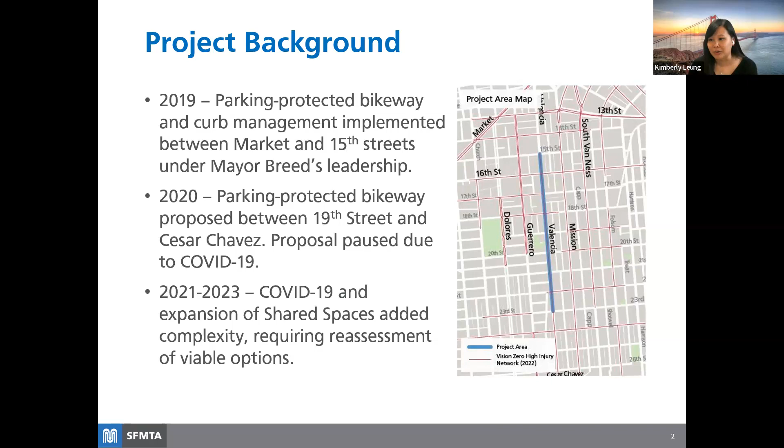Unfortunately, there was opposition to this design, and we actually received numerous requests from individual businesses, merchant associations, and faith institutions to consider a center running design to reduce impacts to the curb lane. But before we could finish working through concerns on the parking protected design with the community, the project was paused due to the COVID-19 pandemic. And since then, the landscape of Valencia has really changed following COVID, particularly with the expansion of our shared spaces program here in San Francisco.

So this image from Google Street View from April 2022 really highlights the challenges that we're trying to address in the project. Here you can see the competing needs of the corridor. There's new shared spaces along the curb, vehicles pulling across existing bike lanes to get to and from parking spaces, and even vehicles double parking in the bike lanes itself.

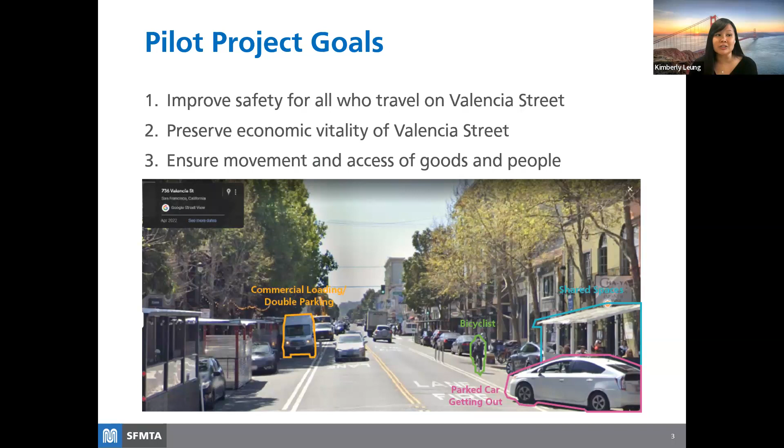So for this pilot project, we identified 3 key goals, which are to improve safety for all who travel on Valencia Street, to preserve the economic vitality of the corridor, and to ensure the movement and access of goods and people. Just taking a really quick look at the data here, Valencia between 15th and 23rd Streets is on the high injury network. From 2018 to 2022, there were 132 collisions, including a fatality on this section of the corridor. Another pedestrian was also killed at the intersection of 16th and Valencia in January of this year.

Within the project limits itself, 40% of the collisions are between vehicles and bikes. The most common reasons for collisions involving a bicyclist were because of unsafe turns, lane changes, and dooring by drivers. So there's currently this mismatch between the high demand for the curb space and the amount of available space for loading. This has really resulted in vehicles double parking in the bike and vehicle lanes. And in addition to that, another 22% of the collisions on the street are between vehicles and peds. The most common reason for those collisions is drivers failing to yield the right of way at a crosswalk.

So getting into the design itself, to address the ongoing safety challenges on Valencia, our pilot includes a suite of tools. We have bicycle safety improvements, pedestrian safety improvements, turn restrictions, and curb management. From the pedestrian standpoint, to increase pedestrian safety, every intersection will include daylighting, which are red zones, to increase visibility among all the different roadway users, and advanced limit lines, which show drivers where they should be stopping.

All left turns off of Valencia onto the side streets will no longer be allowed, and no right turn on red regulations are being introduced at certain intersections. And these turn restrictions are important for pedestrian and bicycle safety, regardless of the bikeway design. The project also includes a complementary curb management plan, which includes a reconfigured curb layout, new cross-street meters, and the application of dual use zones and general loading zones. And I'll talk a little bit more about those new loading zones later on in the presentation.

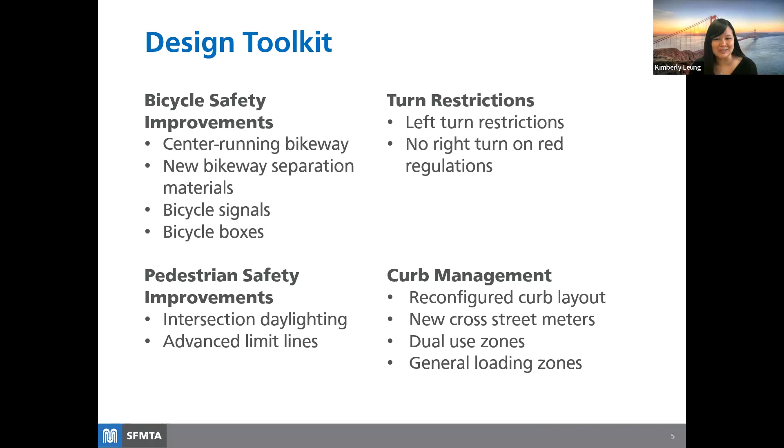So to introduce you to Valencia, this is a cross-section showing what Valencia Street is like today. Between 15th and 19th Streets, Valencia is currently 52.5 feet wide with 15-foot wide sidewalks. And there's currently 1 lane in each direction with painted bicycle lanes on both sides of the street. There is also generally curb space on both sides of the street for loading activities and shared spaces.

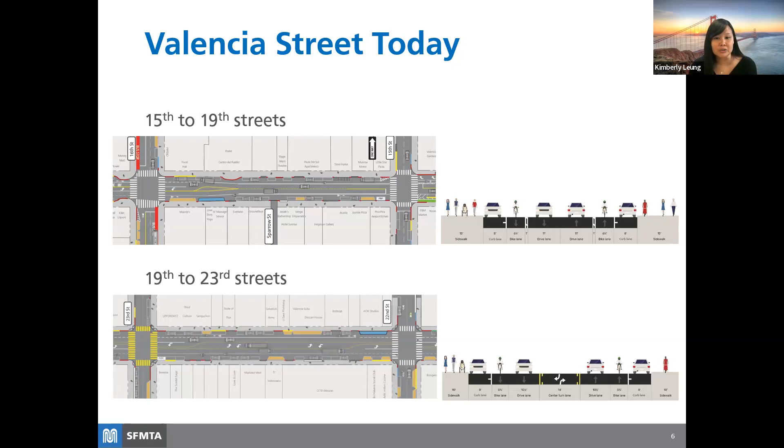On the bottom of the slide, this shows Valencia between 19th and 23rd Streets, a very, very similar cross-section, but the one exception is that this section has narrower sidewalks that are 10 feet wide. So there is additional roadway space for a two-way left turn lane in the center of the roadway.

So with our pilot project, we will be installing a 12-foot wide center running protected bikeway. For those of you that have been to San Francisco and have ridden the two-way bikeway on the Embarcadero outside the ferry building, that bikeway itself is 12 feet wide. So this Valencia center running bikeway will be separated from vehicle travel lanes with a painted buffer that will include new bikeway separation materials. One lane of travel in each direction will be maintained, and curb space will also be maintained on both sides of the street.

This slide shows the design for the block between 22nd and 23rd Streets. Again, this is the slightly wider section of Valencia. So south of 23rd Street, there are painted bicycle lanes. So new bike signals and bike phases are also included at this intersection to, again, transition those bikes between the two different bikeway designs. And at the intersection of 22nd and Valencia, this is really showing our typical treatment that we'll be using to help bicycles turn on and off of the corridor using bike boxes. And because this section of the corridor is a little bit wider, we're able to dedicate more space to the buffer area that will be separating the bike lane from the vehicle travel lanes.

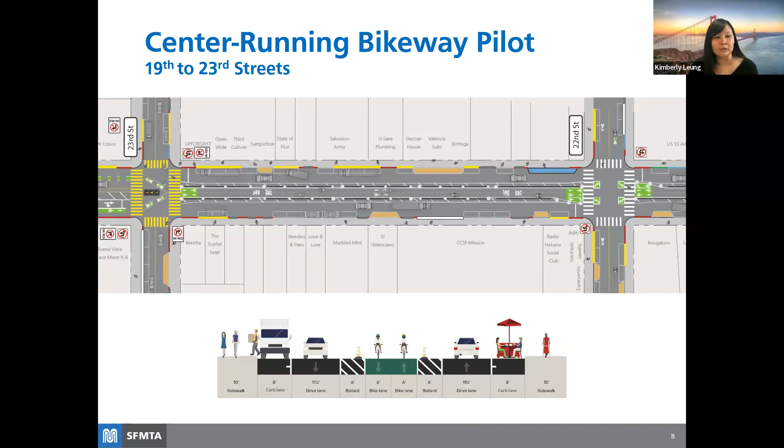So initial outreach for this project started in July of 2022. And in fall of 2022, we launched a virtual open house along with 2 virtual office hours to share this design. Our virtual open house had over 4,600 webpage views, and we received 618 comments and questions. So as you can imagine, it took us quite a while to get through all those comments and actually provide responses to that. But in general, feedback from community groups was mixed. Some people wanted no changes, but most people supported our goal to improve safety along Valencia Street. But people who opposed or remained neutral to the center running bikeway design were supportive of improving safety, but not necessarily of the design itself.

But from the comments and questions that we received during the open house, these were the top 3 concerns. People wanted us to focus on the materials that we're using to separate the center running bikeway from the vehicle lanes. There were also concerns about the enforcement of illegal turns and loading behavior, and also how people would enter and exit the bikeway to access the mid-block businesses.

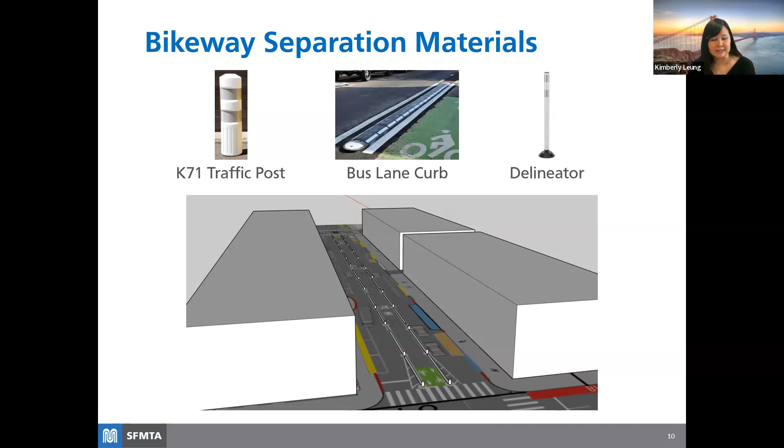So to address the concerns from the open house, we worked closely with our city partners to test more durable and robust bikeway separation materials. So K71 posts and bus lane curbs, both of these have not been used in San Francisco before. We will be introducing these in the buffers next to the bikeway. These materials, along with our typical delineators, are what we'll be using to really prevent that vehicle encroachment into the bikeway. And for people on the bikes who would like to enter and exit the bikeway mid-block, there will be occasional gaps in the bus lane curb material. And again, the intersections will have bike signals or bike boxes to help with that movement on and off of the center running bikeway.

And then just touching a bit on the curb management piece of this project. So as I stated earlier, today on Valencia, there is this huge demand for loading. And because there isn't enough space at the curb, cars are overflowing into both the bike and vehicle lanes. So with this curb management plan for the project, we're going to reconfigure the color curbs to better meet the demands of the corridor. And there are 2 new tools that we're using. Those are the general loading zones and dual use zones.

So general loading zones were first introduced by the MTA in 2021. These zones allow people to pick up or drop off goods using personal vehicles, and they are allowed to leave their vehicle unattended for up to 5 minutes. And there are other instances where we're choosing to combine the general loading zones with commercial loading for trucks and vehicles, and we're creating what we're calling a dual use zone. So this is a zone where there's 2 regulations in the same curb space at different times of the day. Most of the new dual use zones on Valencia are commercial loading during the day and then general loading at night.

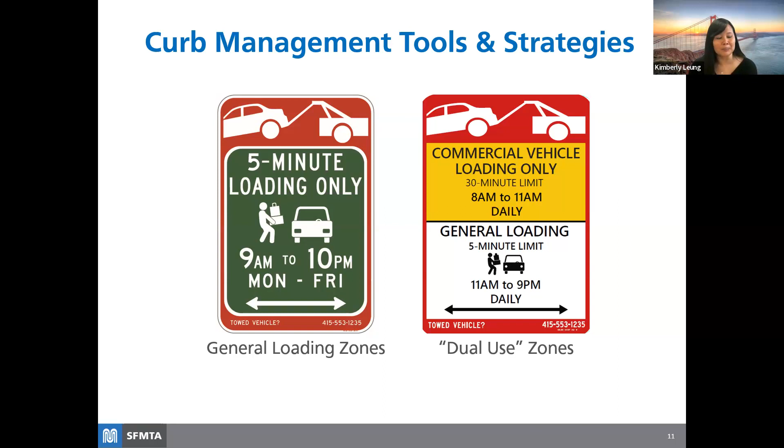So at the start of the presentation, I did say that we initially proposed continuing parking protected bikeways on Valencia, but the direction of the project did change with the onset of the COVID pandemic. So there's been a lot of discussion and feedback on the center running bikeway that was ultimately approved. So I'm going to take some time to walk you through the curbside, one-way protected bikeway design and kind of explain to you why this is not recommended, at least at this time for Valencia.

So on this slide, you can see an example of what a curbside one-way protected bikeway would look like. There's bikeways on both sides of the street. And just with this alternative, the bikeways are shifted to be adjacent to the sidewalk, and then they're separated from the vehicle lane by either a floating curb lane or delineators. And this is a very typical design that we have on other sections of Valencia and also all over San Francisco.

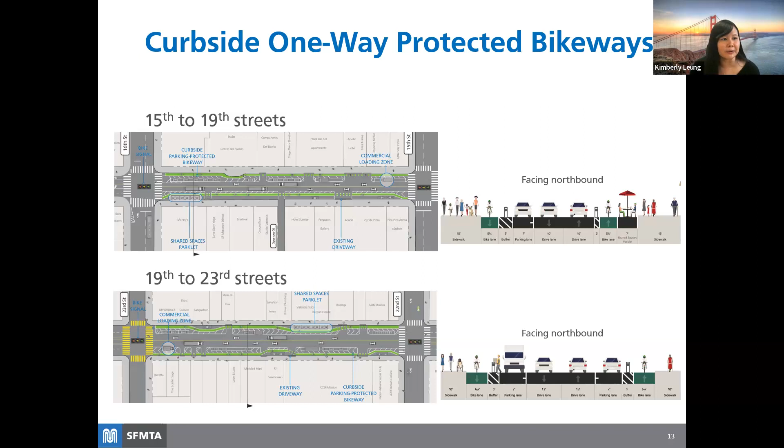So this design was initially proposed as part of our efforts in early 2020. At that time, approximately 40% of the curb space would have been repurposed for the protected bikeways. With our shared spaces program that was introduced during COVID, one of the things with that program is that they do not typically permit floating parklets due to accessibility concerns. So with the curbside bikeway design, that bikeway does have to weave around the shared spaces. That weaving reduces the available curb space for loading, and it also increases the unused space, particularly when the bikeway is making that transition to and from the curb. So that reduction of curb supply could result in more double parking or blocking of the bike lanes.

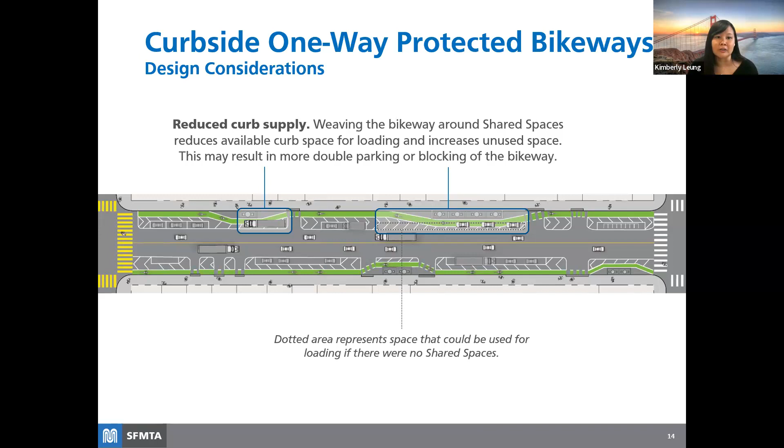But also more importantly, if this design were to be proposed for the section where Valencia is a little bit narrower, there would be more significant curb impacts. We would actually not be able to have parking and loading on both sides of the street. So in the wider section of Valencia between 19th and 23rd Streets, floating curb space can be installed on both sides of the roadway. However, in that narrower section of Valencia between 15th and 19th, floating curb space can only be maintained on one side of the street, as it's shown in this slide.

The San Francisco Fire Department requires 26 feet of clear width for emergency response operations. So on this slide, you can see the floating loading on the top part of the image. But once you convert the opposite side of the street to floating loading, the design doesn't meet the clear width requirements of the fire department. So here, loading can only be maintained curbside on the opposite side of the street, but the bikeway then cannot be protected with delineators or other materials.

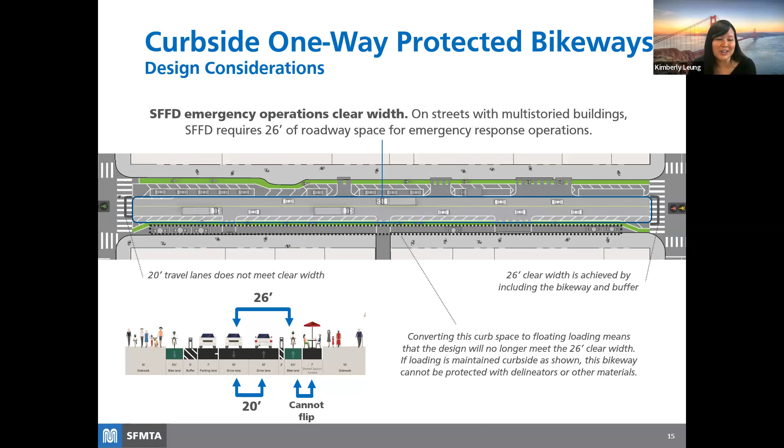This slide shows a variation of a protected bike lane on the opposite side of the street where all the curb space can be converted to shared spaces or other roadway activations. We could also do something where the bikeway can continue to weave back in towards the curb to allow a wider buffer between the vehicle lane and bike lane, but in general, there are greater impacts to the curb with this design.

And then finally, since the shared spaces program typically doesn't permit floating parklets, the addition of any new shared spaces or even the removal of existing shared spaces would require us to constantly realign the bikeway. So in both situations, we're going to need to reconfigure the curb layout to meet the new loading needs of the block. And this process does take some time to redesign the bikeway and redo the curb plan. It will require us going to a public hearing every time before we would be allowed to remove and install the new roadway paint and delineators.

Businesses right now are still continuing to adjust their operations following COVID. So this curbside, one-way protected bikeway is just not really recommended right now while we sort out our shared spaces program and the loading issues on the corridor.

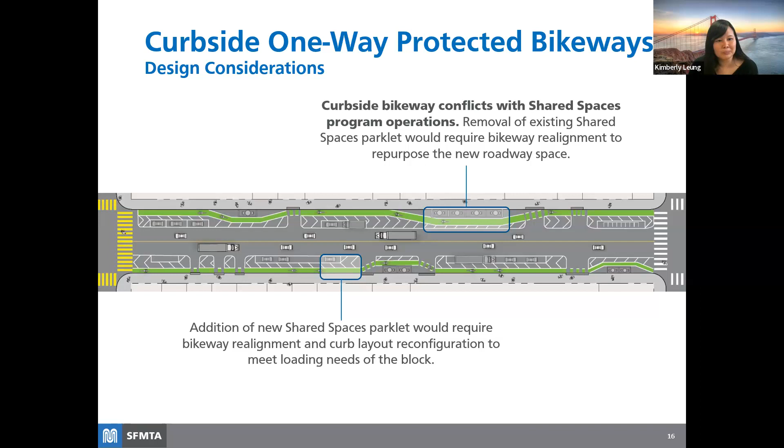So just again, given the design constraints at this time, we are choosing to pilot a center running bikeway between 15th and 23rd Streets for up to 12 months. We will be fully evaluating this because we do recognize that this is a new and different design in the US and in San Francisco. So we will be looking at metrics, including safe behavior, effective design, and mobility as a part of our evaluation.

So to really understand if the behavior out there is safe, we will be observing user compliance with the new left turn restrictions and bicycle signals, vehicle speeds, and bicycle and pedestrian conflicts at the intersection. We'll also be looking at traffic collision data, vehicle loading behavior, the bike positioning on the street, bikeway ease of access, and emergency vehicle interactions with the bikeway to see if the center running design is actually an effective design for Valencia.

And we also want to understand the mobility trends. So we'll be taking a look at bicycle, pedestrian, and vehicle volumes, transit travel times, and changes in vehicle congestion levels. We'll also be doing intercept surveys to really understand where people are coming from, where they're visiting on the corridor, and how they're choosing to travel to and from Valencia now. So ultimately, all the findings from this evaluation will help inform the more long-term design for the corridor.

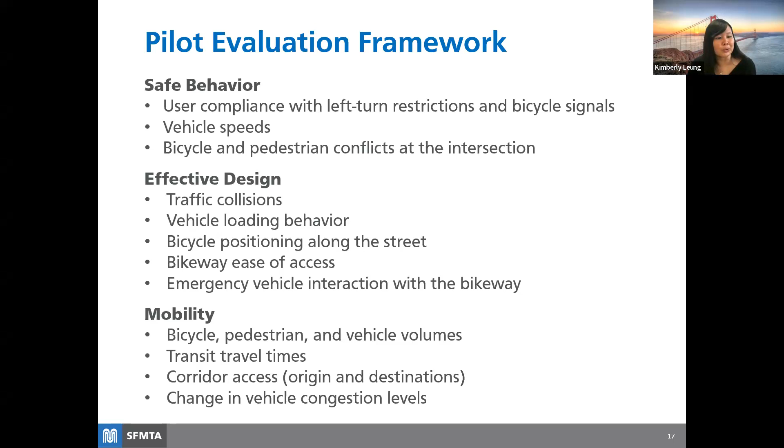And this project was approved on April 4th, and we did begin construction 20 days later. As a part of our project, we will be making observations and collecting data. Our first milestone for data collection will be this fall, 2023, and we'll also be taking a look at data some more in spring of 2024. By the end of this year, we are going back to the SFMTA board with some initial findings from our first evaluation period.

Some other work that we're doing will be starting this summer. We'll be studying the long-term visions for Valencia and working with the community on additional pilot treatments that could help inform the long-term vision for the corridor. So the study and these potential pilots will also be looking at placemaking and traffic circulation along the street to really just help further the pedestrian and bicycle safety goals that the MTA as well as the community has for Valencia. So I will wrap up this presentation by sharing some photos of our construction over the last month.

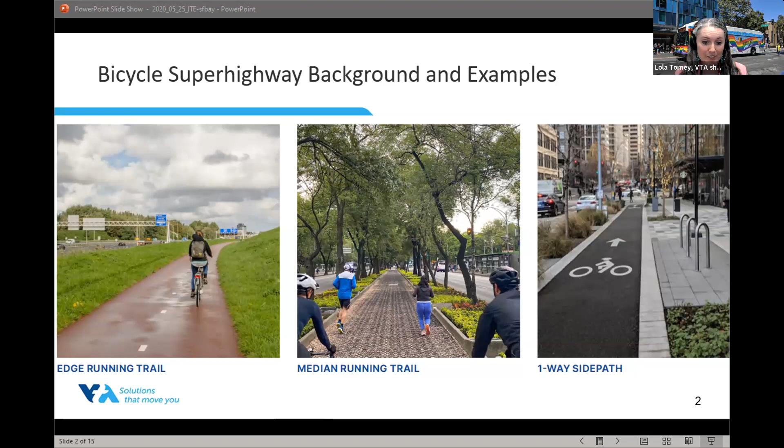And so you can see the bike superhighways can have varying designs that provide separation from vehicles and provide low stress. So in our next slide, we're going to answer, what makes a bikeway super? What is a bike superhighway? They are quickly direct. They don't require bicyclists to weave around side streets or take back roads. So there's a direct and easy route for bicyclists. They're accessible. They take you where you want to go.

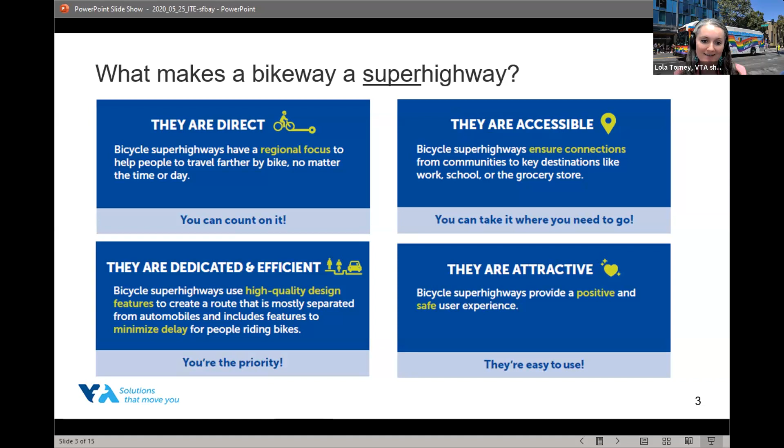They are dedicated. They offer bicyclists their own space that is separated from motorists and pedestrians. And they are efficient. They reduce delay for bicyclists. And most importantly, in my opinion, they are attractive. They are a pleasure to ride on. They bring people joy and really want people to ride bikes.

And so in 2021, our VTA board adopted the Bicycle Superhighway Implementation Plan that proposed a bicycle superhighway network that would serve our county. We narrowed the proposed list down to 17 corridors. We had like 35 to start with and narrowed it down to 17. And most of the networks build off our existing trails. They're labeled here on the map, you can see.

Most of these trails actually run north-south. That's just based on the topography and geography of our county. Most of the trails run adjacent to our creeks and rivers, which run north-south. So when we were doing the outreach for our countywide bike plan, we kept hearing from folks, we really need an east-west bikeway. So we focused on that for our first study that we were calling the Central Bikeway Study. Go ahead, Brent, hit next slide.

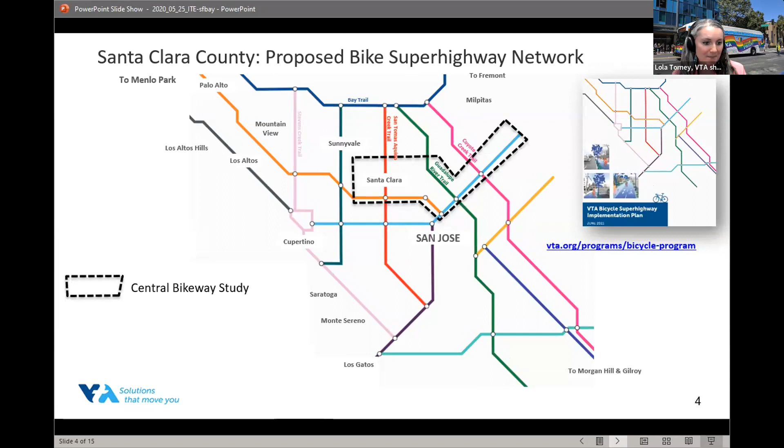Boom, there it is. That really studied the east-west corridor from the city of Santa Clara up to North San Jose over into the east. And so here is a list of the final routes, all the 17 routes shown on the map. We used to have Central Bikeway Study, which is underlined here in the requires further study to determine feasibility. We were able to, through the Central Bikeway Study that we'll talk about in a second, move it over to the planning work done and corridor alignment fairly certain column. So that was a win.

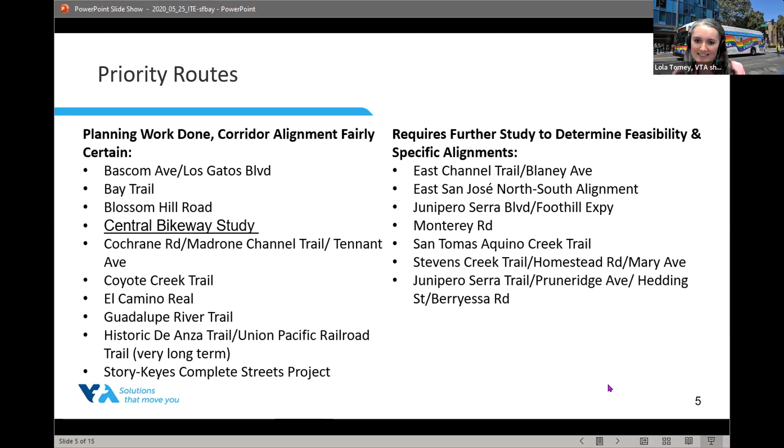And I want to also, in the next slide, point out one more aspect that I thought was new for the Bicycle Superhighway Implementation Plan. We put together sort of snapshot maps of implementation for each of the 17 corridors, showing what phase different segments are in based on whether that's just conceptual or if it's fully built. And then I want to also on this slide show some examples of the Guadalupe River Trail that you can see that are complete, that hopefully will add to that experience, as we mentioned before, that makes a bikeway super, the artwork and making it joyful and accessible and connected.

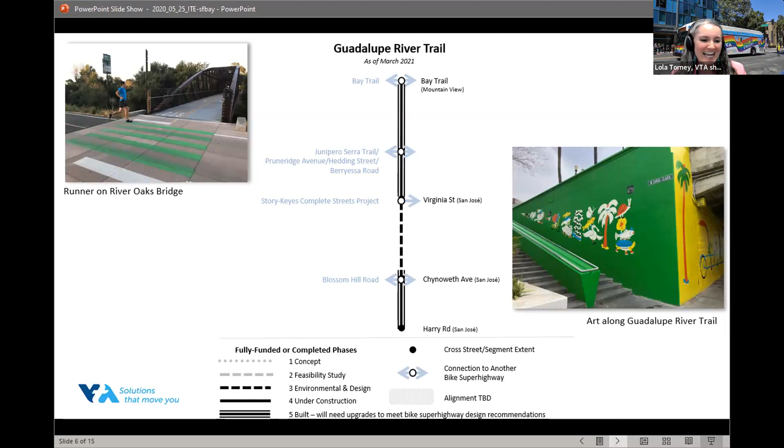So with that, I will stop talking and transfer it over to Brent, and he will go over the Central Bikeway study in particular. Yeah, so great to be here in this space with you all today. My name's Brent Pearse. I'm a planner. My pronouns are he, him. I was the project manager for Central Bikeway. So Lola's really walked us through kind of the large part of the funnel for our superhighway network in the county, and then we're going to kind of narrow it down to this one corridor. Central Bikeway, we went through a feasibility analysis and created 10% concept design plans, which our board recently adopted in May, and the city of Santa Clara recently adopted in April.

So this is a 10-mile corridor here in blue, going from kind of the Sunnyvale western border on the left to East San Jose on the right. And you can see those three green lines. Those are our really important north-south trail corridors that exist today in the county. They move a lot of commuters on bikes and are also used for recreational activities. Central kind of goes through the hub, the core of Santa Clara, the economic engine along El Camino. El Camino is a state highway as well, so it comes with its own other design challenges in delivering this facility. Caltrans was our partner and funder on this study, so we worked closely with their team on that.

It connects to great destinations, Santa Clara University, large transit centers, Santa Clara Station, also where our future BART terminus will be in South County, in Santa Clara, downtown, and then connects to the existing Berryessa BART station as well.

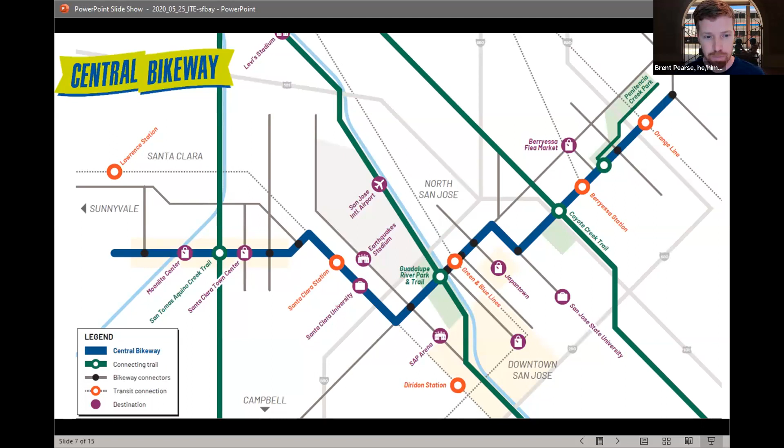So we really wanted to lead this project differently than we've done before. We did that with community in mind. So not only did we engage with community, but community was also part of our team. We worked with CBOs directly on our team. The Bike Coalition was one of our primary subs. And then we had two other subs, Meta LLC and the Guadalupe River Conservancy, that really helped us deliver this project. I want to emphasize how important their role was on this project, and that we could not have delivered this project without them during the challenging last 3 years that we had. I mean, really, truly, we would not have been able to connect with community the way we did without these agencies out in the field talking to people through one of the most challenging times I think any of us can remember in our lives.

We really learned some really interesting things through this study, that if we build a superhighway with high quality features that's direct, and really all those super features that Lola covered earlier, that 47% of these people would use this bikeway for utility needs, right? To get to school, to get to work, to actually do those mode shift things that we're really intending for facilities like this. And 30% of those people don't do that now. They only ride for recreation. This was a huge number. We were not expecting a number this high in our surveys and our engagement. We generally see this number like less than 5%. So, and of course, the biggest thing, people want to be separated from traffic, right? To do these things, they want clear separation and protection.

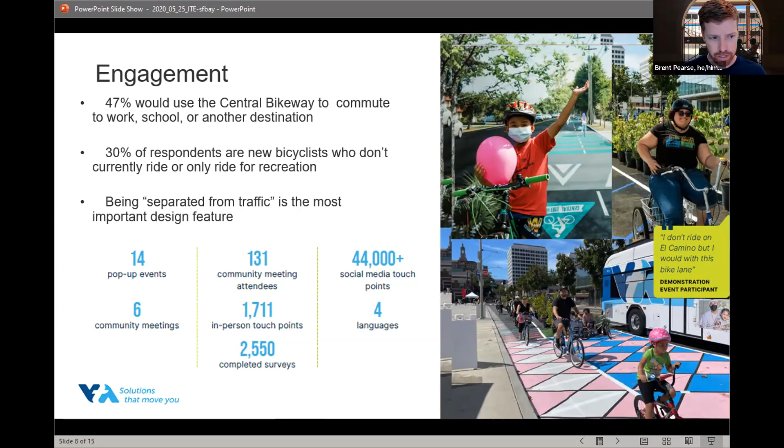So I'm going to walk you through some concept designs. I realized as Kimberly was going through her presentation, I was like, oh, I better throw some cross sections in here. So I quickly threw some cross sections in here for you all to see some details, because I didn't have that in the original presentation. I'm going to walk you through three segments that are kind of the three most different segments of the corridor.

This is El Camino Real, right? Major state highway, 6 lanes. The vision for El Camino Real is a side running bikeway of 7-foot width. It will narrow slightly as it goes around our VTA transit stops on the corridor. This is intended to be built within the existing curb to curb right of way. Santa Clara's council has approved parking removal on almost 95% of their entire section within their city. So it will be envisioned to be built in that space.

We've done some really key things here with the design to enhance our safety. On El Camino Real, the bikeway is envisioned to be sidewalk running. It's designed to have high quality wayfinding, pedestrian lighting, and as you cross through the numerous curb cuts that we have along El Camino, it will also be raised with those sections as well. Puts the biker a little higher than you would be on the street, provides a little more attention in this really kind of conflict zone that we can see here in this scene.

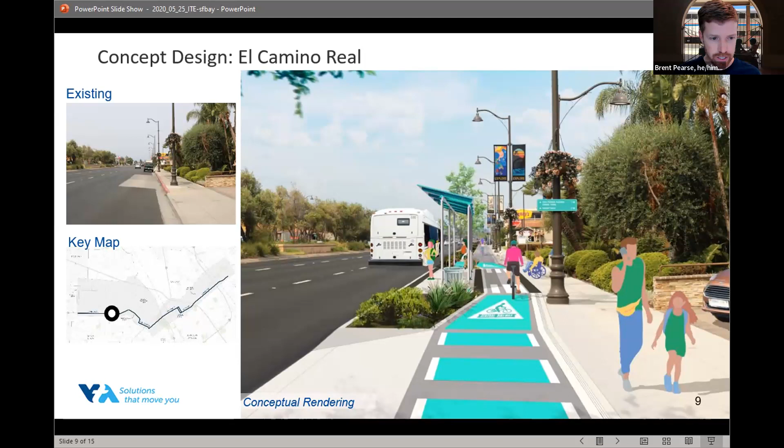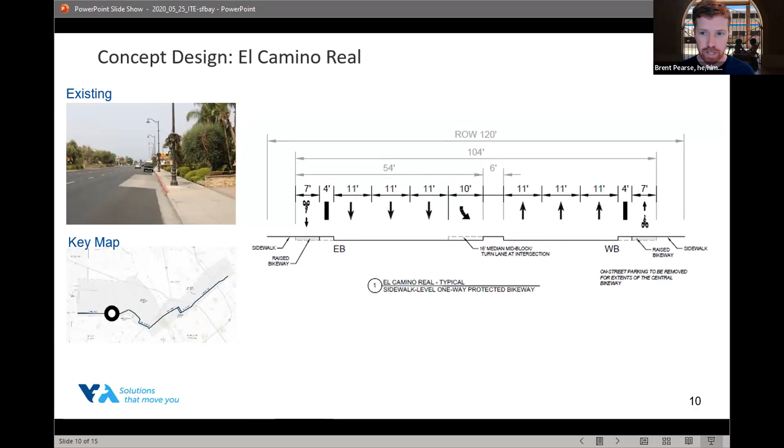So here's the cross section and right of way. So we have about 104 feet to work with. We have programmed 11-foot travel lanes, generally a 3 to 4 foot buffer for the majority of the bikeway, and really wide, comfortable bike lanes at 7 feet. That's one of the key features we see as a superhighway, is providing a little bit more space for passing and merging and things like that to provide nice travel for cyclists.

Moving to Hedding Street, this is a more intimate street in San Jose in the northern section of downtown. This is an example of what a protected intersection could look like. So the entire 10 miles will have a protected intersection at every signalized intersection. I think it's about 20 plus intersections that will be protected. And there's over 40 minor intersections, and I'll show you a detail of what that will look like next. But for signalized intersections, we intend to have full protection.

Again, you can see a really kind of emphasized example of what wayfinding could look like here. Wayfinding for long distance travel on bikes is really, really important, and I can't overstate this enough. You want to get off the BART train at Berryessa and go to a key destination and ride Central Bikeway. We want to be really clear for you as a user, if you've never been here, how to travel over a long distance to do that. So we see wayfinding as a really important part of our network.

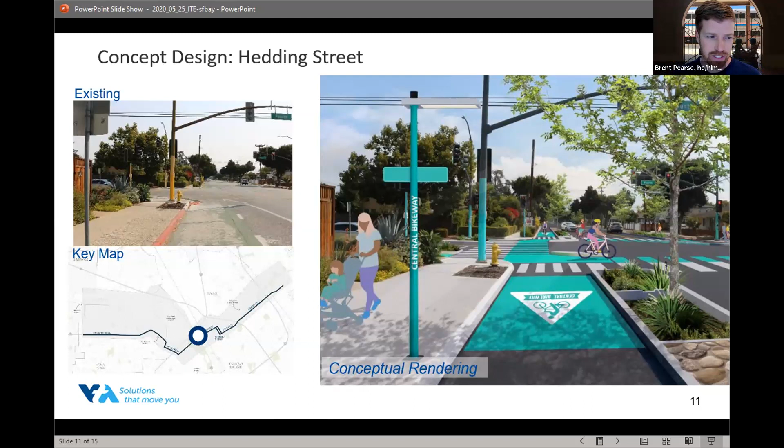We envision on the street too a little bit more green infrastructure, possibly in the separation. Of course, we have to figure that out a little bit more as we advance the design. So still 7-foot bikeways, 4-foot barrier, smaller lanes, retaining some parking. There is some parking removal at certain sections, generally at the intersection approaches in this part of the segment.

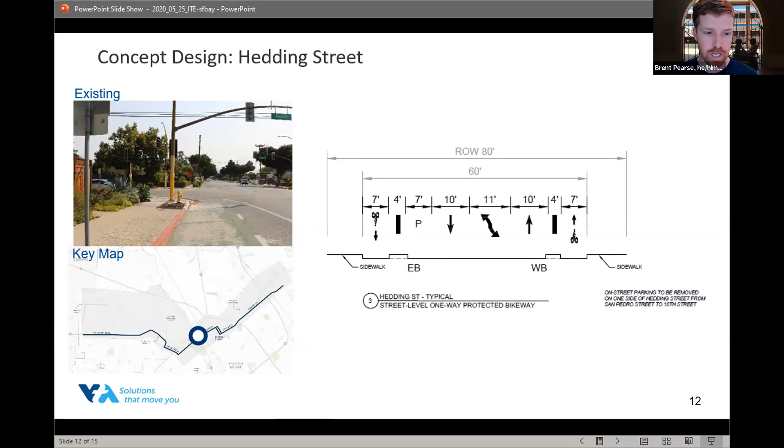So on Taylor Street, we're electing to do a 2-way facility. There was a lot of back and forth with the community, with the city of San Jose about this, but we chose to do a 2-way facility for a period of about 1.5 miles on the western approach to the BART station. And the reason for that is there's an existing 2-way facility already exiting the BART station. So another one of those key super features for bike highways is not a lot of change in your facility type. So you really want to be clear for the cyclist what the facility will be like and maintain that kind of typology for as much time or distance as you possibly can.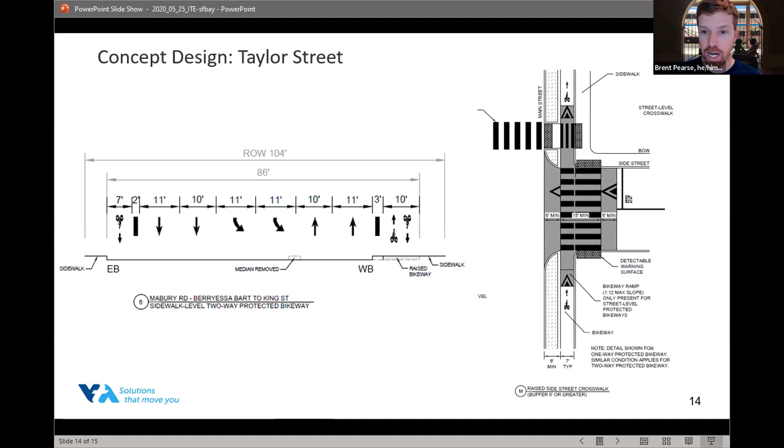$213 million. Does that shock anyone? Sometimes that's really shocking. Wow, $200 million for a bike project? Are you crazy, VTA? But I want to remind everyone how visionary and transformational this is, right? This is a 10-mile project with 20 protected intersections and 50 other minor intersection enhancements. This is not out of scale with a bus rapid transit project or an interchange project, both which VTA also deliver in our county. We see this as having regional significance and huge gains for the regional network of biking.

We have applied for a federal RAISE grant. We'll know in June, fingers crossed. We'd love if you all could cross your fingers for us as well. Our implementation goals for this project are to do all the design and environmental for the whole corridor as one. And working with our partners and our design partners, Alta, who I believe are on the call today, setting this project up for funding, we really felt that that was the best strategy. Likely we will deliver construction in phases, given that it has unique challenges depending on the jurisdiction and location for the project.